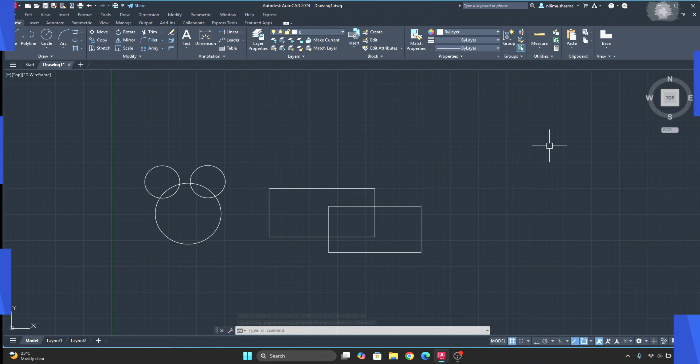Let's start with the trim tool, which you can find in the modify panel of the home tab, or simply use its command TR and press enter. After activating the tool, you can see the mouse cursor with a rectangular box, and if I put my mouse cursor anywhere, the line gets erased.

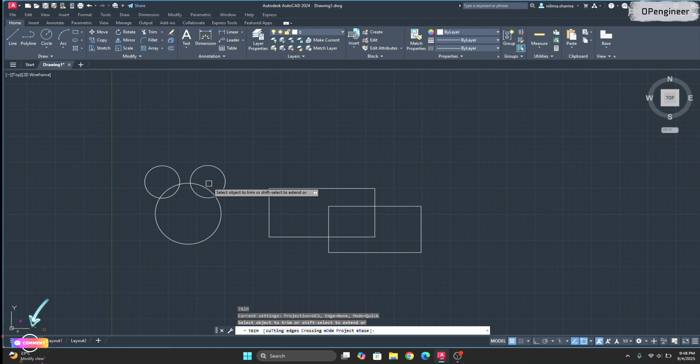So here I want to delete some of the lines. If I click on it, it gets trimmed, and here you can see I got a Mickey Mouse head. Here I have drawn two overlapping rectangles, so if I click on this part, it gets trimmed.

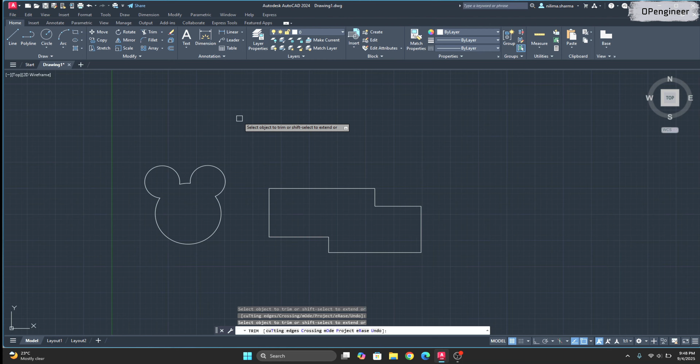If you look here in the trim tool, you'll find a drop down, and that's extend. To activate the extend tool, you can click here, or when you have the trim tool activated, simply press shift on your keyboard and move your mouse cursor. Here you can see the line that I trimmed recently got extended.

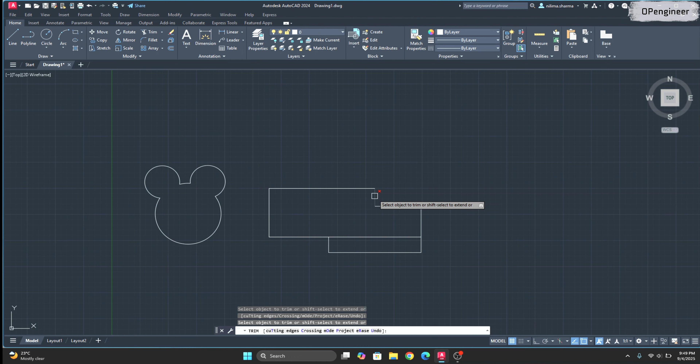Click on it and your line is extended. Now I am not pressing shift, and it is being trimmed, being erased. If I click with shift, the line gets extended. That's the use of the extend tool, you can extend the line as per your need.

Let's delete this for now, and move to the next tool, fillet. If you click the drop down just beside fillet, you'll find three options: fillet, chamfer and blend curve. Let's start with fillet.

For that, let's make a rectangle of length 500 and width 300. So here your rectangle is drawn, and now let's start with the fillet tool. When I click on fillet, the command line asks to select the first object, and there are various options on the side of it.

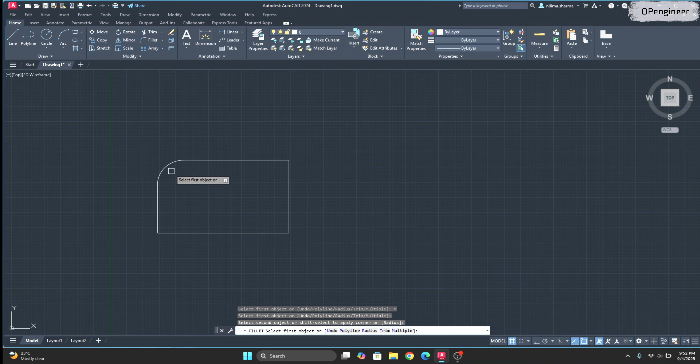I'll click on the radius option to specify the radius of the fillet, taking 100 for now. Press enter and select the multiple option to create fillets on multiple sides of the rectangle. Now the command line asks to select the first object, so this side will be the first and this side the second. Here you can see a fillet created in this corner of the rectangle. You can create a fillet on every side, or whichever side is important to you. So here the rectangle has a fillet on all sides.

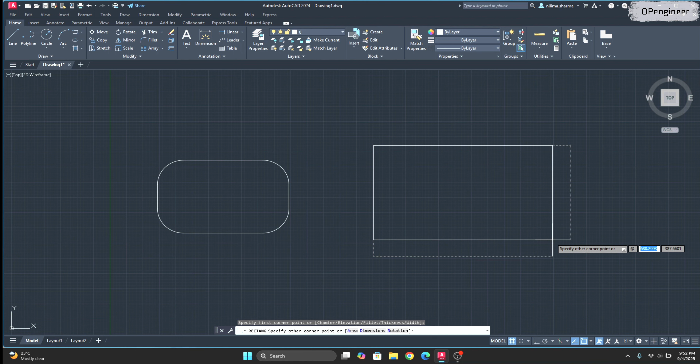Let's skip this tool for now and make another rectangle because we'll be using chamfer next. Let's make another rectangle of the same dimensions, length 500 and width 300. So here another rectangle is drawn, and now let's start the chamfer tool. Click on it, and the command line asks to select the first line, and for chamfer we need to specify the distance.

Click on distance, and the command line asks to specify the first chamfer distance, so let's take 50 for now. Press enter, and the second chamfer distance is already 50, so let's go with the default value and press enter. Click on the multiple option to create chamfers on multiple sides. Now select the first line, second line, another line, another line. Here you can see I have created a chamfer on these two sides of the rectangle.

Now let's learn about the angle option, which we can also use to create a chamfer. Click here in the chamfer tool, and it asks me to specify the chamfer length on the first side, so let's go with 40. Press enter, and now you need to specify the angle. I recently used this one so it's set to 60, let's go with the default value and press enter.

Now you need to select the first line, so this side will be first line, second line, first line and second line. Here you can see I have created a chamfer with an angle of 60 degrees.

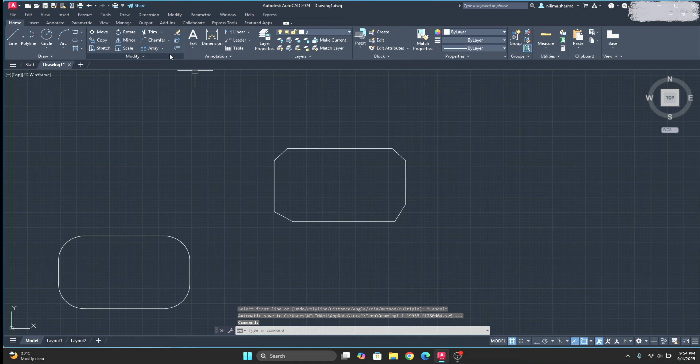Skip this for now, and the third option is blend curve. For that, let's draw two splines. Here you can see I have drawn two spline lines, so now let's go with the third option, blend curve.

Click on it, and the command line asks to specify the first object. This is my first object and this one the second. Now you can see a smooth curve is created that connects the two splines. That's the use of the blend curve.

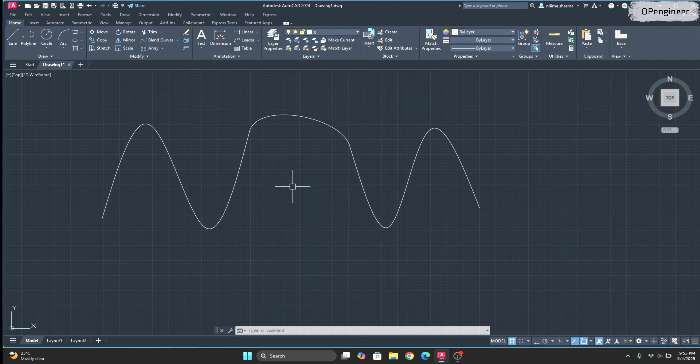Let's delete this too, because we'll be learning another tool, array. For array, in the drop down you will find three options: rectangular array, path array and polar array. Let's start with rectangular array.

For that we need to draw a rectangle. Click on the rectangle and let's make one of dimension 20 and 15, press enter. So it's a small rectangle.

So here I have drawn a rectangle, and let's draw a circle at one end of this rectangle.

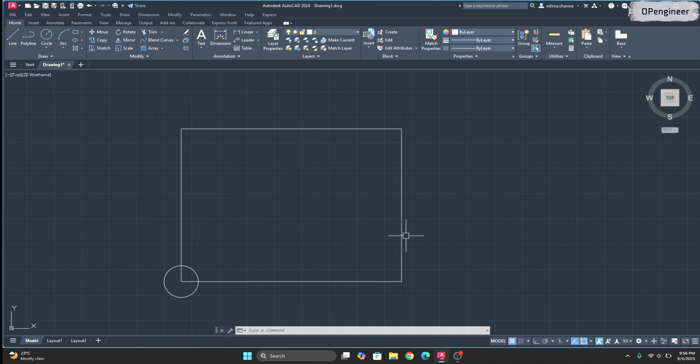Now I want circles on all the other corners of this rectangle. I could simply use the copy tool to copy this circle on all other corners, but for now I'll use the array tool. Click on this arrow and click on rectangular array. The command line is asking to select the object that needs to be added, so I'll click on this circle and press enter.

Now you can see multiple circles are drawn. In the command line, the first option is associative. Click on it. Currently it is set to yes, which means there will be association between the original circle and the array circles. If I click on the no option, there will be no association between these circles. So I'll go with yes for now.

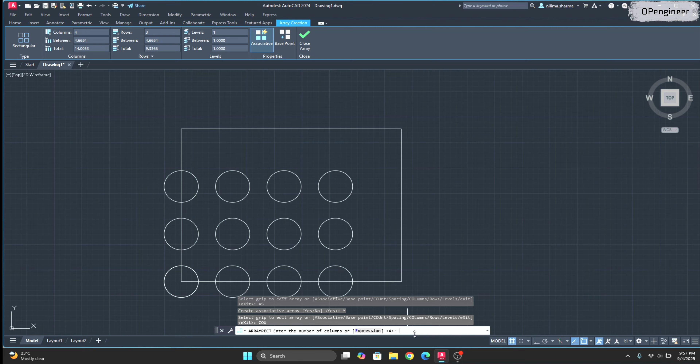Now you can see the count option. Click on the count option and enter the number of columns. The number of columns will be 2, and the number of rows will also be 2, because here you can see 1, 2 — so 2 circles will be needed in the columns and 2 in the rows.

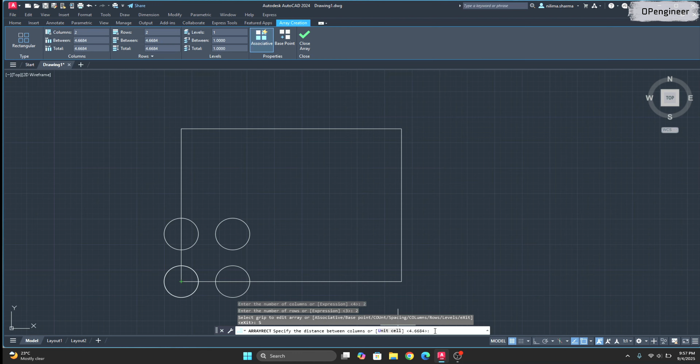Now we need to decide the spacing between them. Let's click on spacing. Now we need to specify the distance between the columns. The length is 20 — the command line is asking to specify the distance. Type 20 and press enter, because the length of this rectangle is 20.

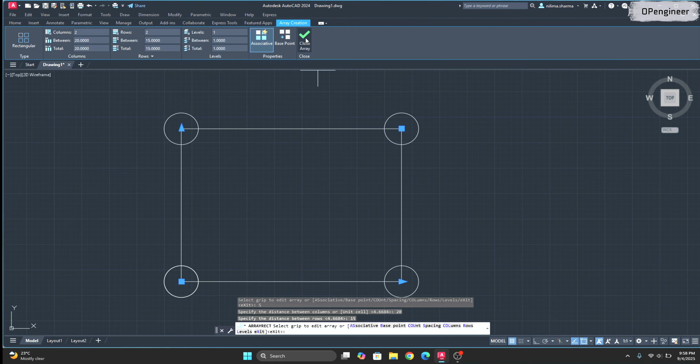Now we need to specify the distance between the rows. Let's take it as 15, because the width of this rectangle is 15. Now you can see a rectangular array is drawn. If you are done with this, simply click on close array and you are done.

Next in this option is path array. For that, let's make a spline. I just created a spline out here, and now let's make a circle at one end of this spline.

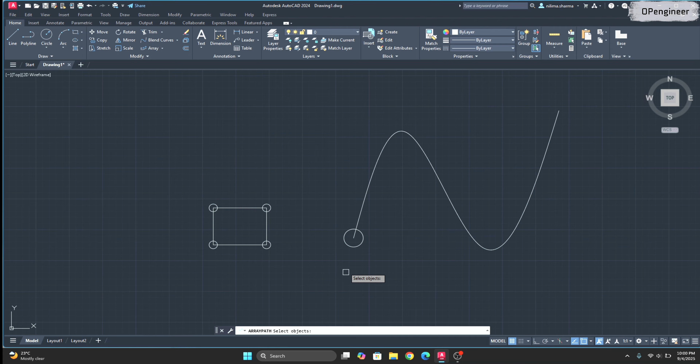Now let's start this path array tool. Click on it, and the command line is asking to select objects. I'll click on this circle and press enter. Now I need to select the path curve, so I'll click on this spline. Here you can see these circles are along this spline line.

Now you can see the circle is added along the spline, and in the command line there are various options. Let's go with the item option here. Click on it, and now we need to specify the distance between the items. Currently the distance is 10, so it has a distance of 10 between these circles. I'll make it 5 and see what the difference will be.

After setting it to 5, you can see the circles are arranged very closely to each other, and the number of circles has also increased. You can select this 'fill entire path' option here. After clicking on fill entire path, you can see the whole spline line is filled with the array.

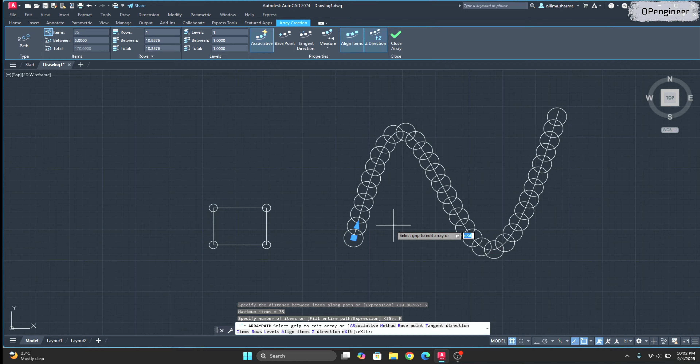So that's all with the path array tool, and if you are done with it, just click on the close array tool.

Next in the option is polar array. For that, let's make a circle, and let's make another circle on one end of this. So here you can see I have drawn a circle and another small circle on the circumference of the circle.

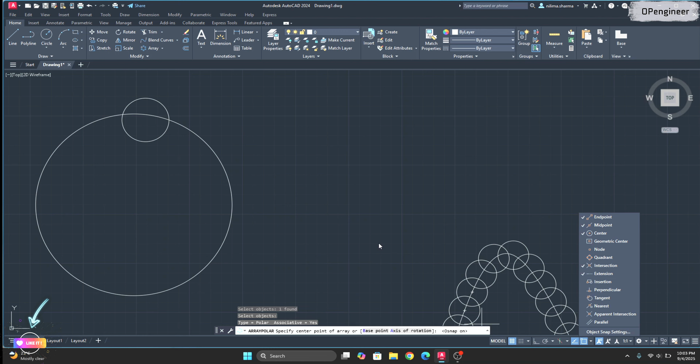Now I'll choose this polar array, click on it. The command line is asking to select the object — I'll click on this small circle and press enter. And I need to specify the center point of the array. This is the center of our circle. I'll click on it, and now you can see the circle being added along the circumference of the circle.

If I click on the item option, I can specify the number of items. So I'll click on it. Here you can see there are only 1, 2, 3, 4, 5, 6 circles out there — so it is 6. Let's make it 12 and press enter. Now you can see the circumference of the circle is completely filled with these small circles.

Here you can see another option, that is fill angle. Click on it, and I need to specify the angle to fill. It is 360 degrees, and the complete 360 of this circle is being filled along the circumference. If I need only half of this, I can type 180. So let's go with 180 for now, and press enter.

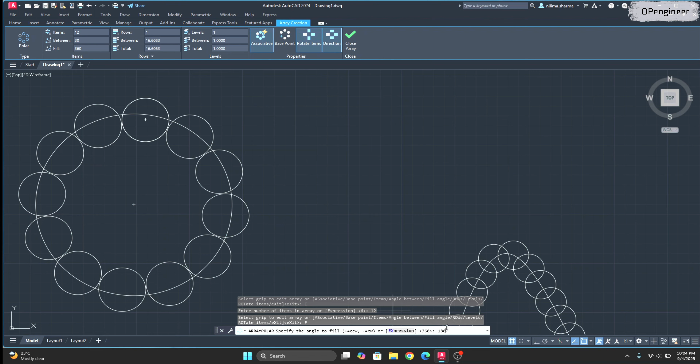So you can see only half of the circle — only half of the circle is being filled with these small circles on the circumference. I'll again click on this fill angle and type 270 and press enter. Here you can see at the angle of 270, the circumference is being filled with the smaller circles.